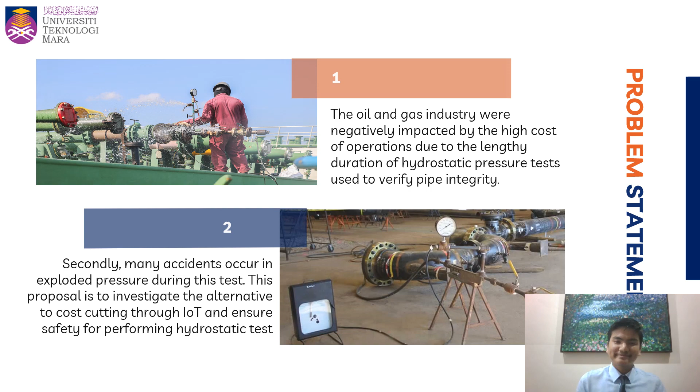This project has three objectives. First, to digitalize and monitor the pressure sensor using an IoT application. Second, to reduce the operation cost by improving worker productivity. Lastly, to maintain the safety of workers during hydrostatic test execution.

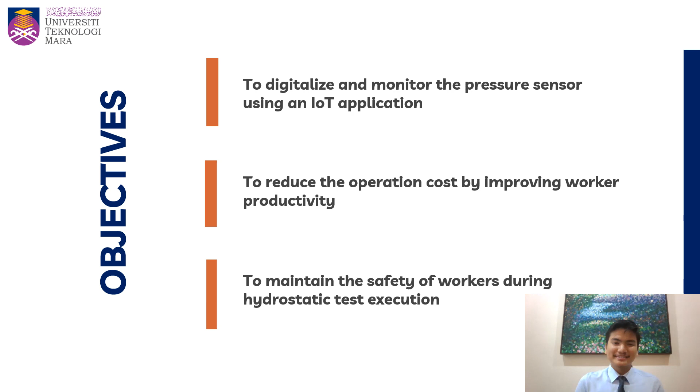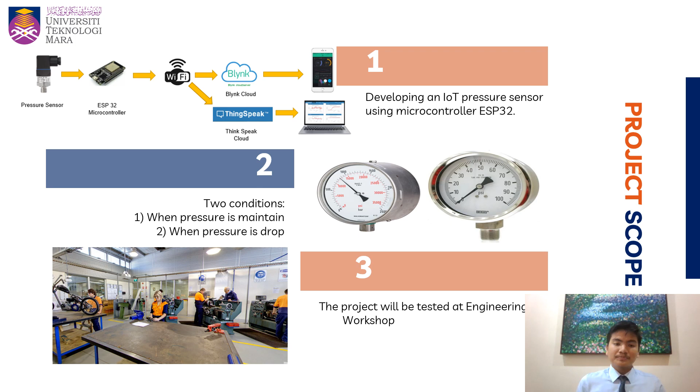The project scope focused on developing an IoT pressure sensor using microcontroller ESP32 to be used for remote monitoring of hydrostatic pressure tests. Next, this project will be carried out in two situations: when the pressure is maintained and when the pressure drops. Lastly, this project will be tested at the engineering workshop.

Project limitations for this project have three factors. First, it contains fragile hardware such as the microcontroller ESP32 that could lead to error and system malfunction. Second, it needs a stable internet connection and sufficient power supply. Third, it needs a dedicated worker who has basic knowledge about IoT and programming in order to be maintained.

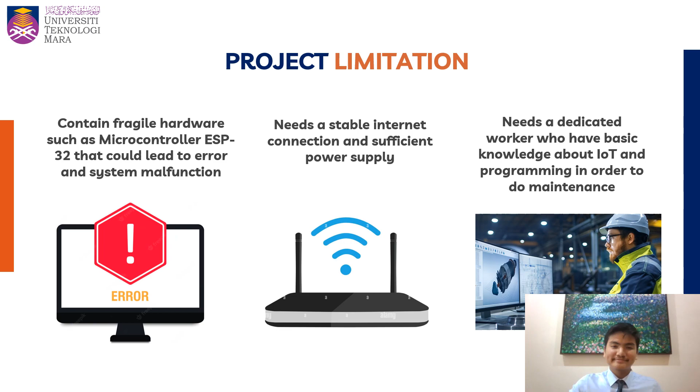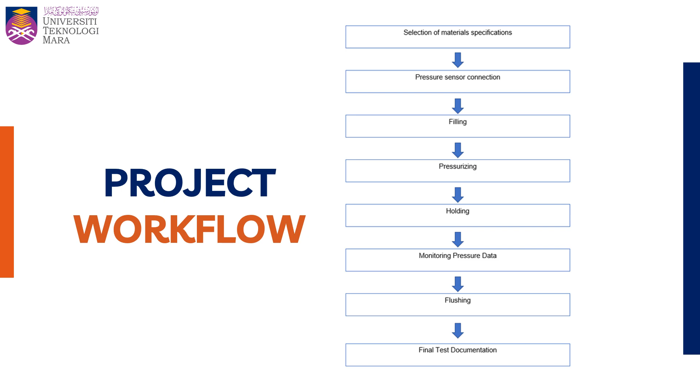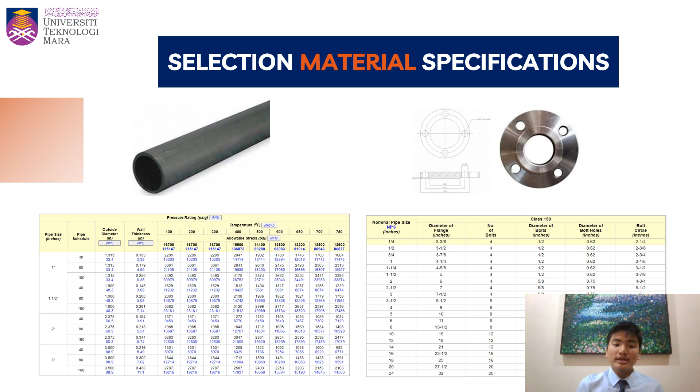Methodology. So here is the project workflow for this FYP. This project will be conducted at 10 bar pressure. Hence, for material selection specification based on ASME and ANSI standards, this project will use a 2-inch diameter schedule 40 seamless steel pipe with a combination of a 6-inch diameter flange. Both materials have been calculated to sustain 10 bar pressure.

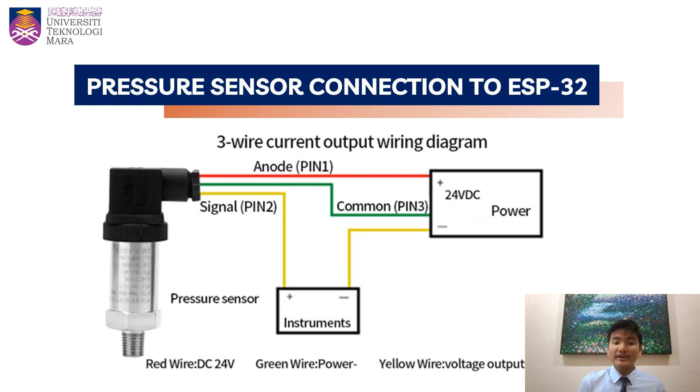For the pressure sensor connection to ESP32, here is the schematic wiring diagram to show how it will be connected. Red and green wires will be connected to the power source through an AC to DC converter in order to function. Lastly, for the output signal, this pressure sensor will transmit 5 volts to ESP32 to analyze the data.

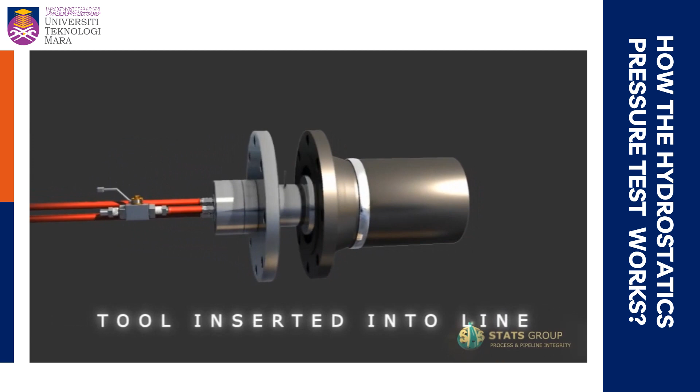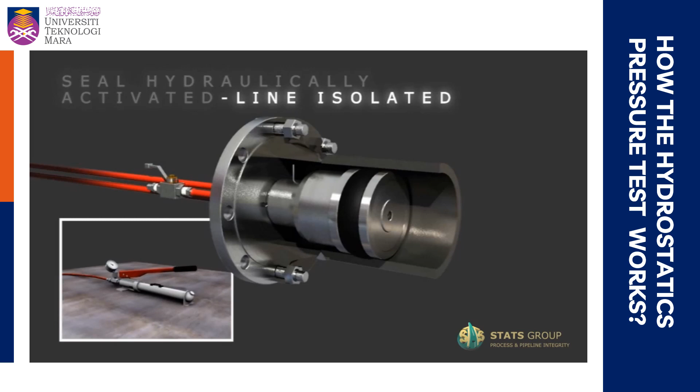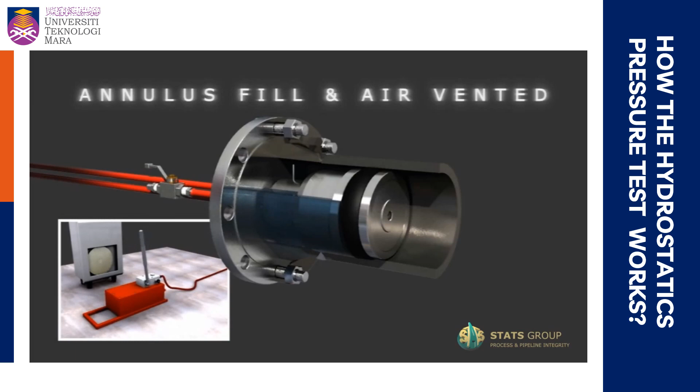So, this slide tells us how the hydrostatic pressure test will be conducted. After inserting the bolts and nuts to the flange, it needs a hydraulic seal to prevent any leakage. Next, the water will be filled into the pipe before the valve is shut off. Then, the pipe will undergo pressure filling until it reaches the desired setting pressure.

Then, the pipe will undergo a hydrostatic pressure test for 1 hour. After finishing the test, the seal is opened to let the water pass through. Lastly, remove bolts and nuts in order to remove the tool.

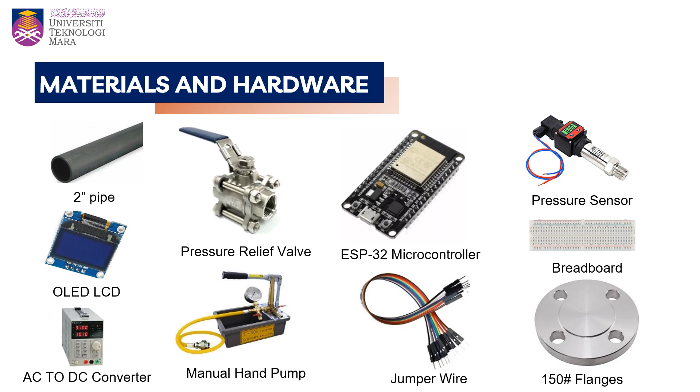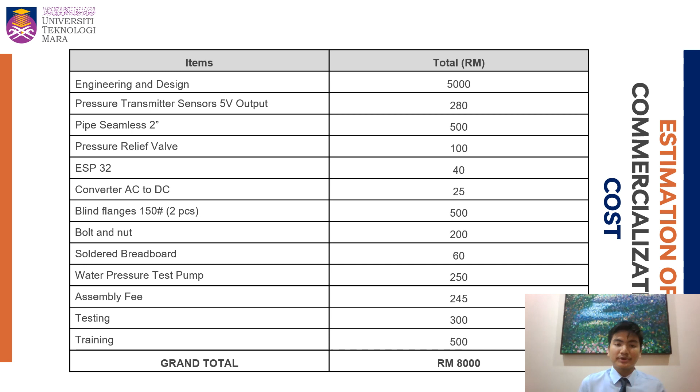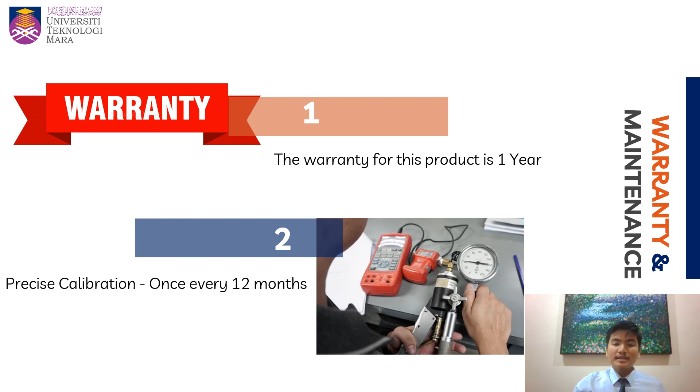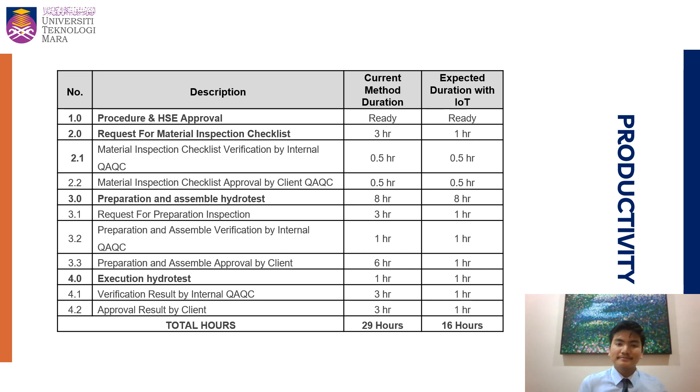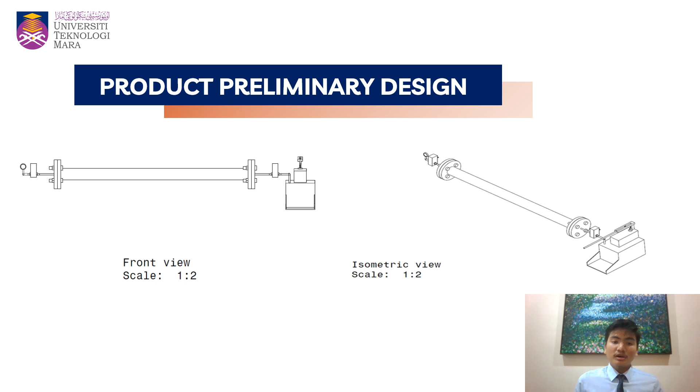Thus, this project will convert all the hydrostatic procedures, including the verification process, using IoT and cloud network to shorten the testing and verification process. So, in this slide, we will see the front view and the isometric view of the product preliminary design. Reference.